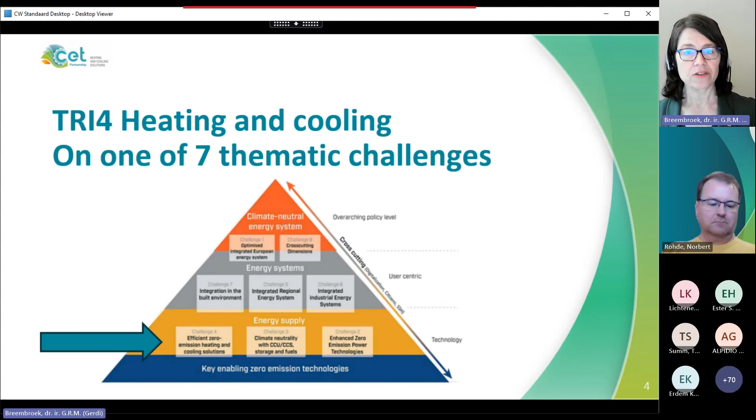When it comes to heating and cooling, we can think about solar thermal, we can also think about geothermal. But today the solar thermal technologies are in focus. We want to highlight the transformative power of solar thermal energy and share with you potential recent developments, and hear about the ongoing projects on solar thermal in the CET partnership that come from the 2022 call.

So we will, in a way, set the scene of this research and innovation collaboration that we want to emphasize and strengthen on solar thermal, and we want to make you aware of what's ongoing, what the environment is for these technologies, but also make you aware that there will be a new call with new potential for you to be involved in funded projects.

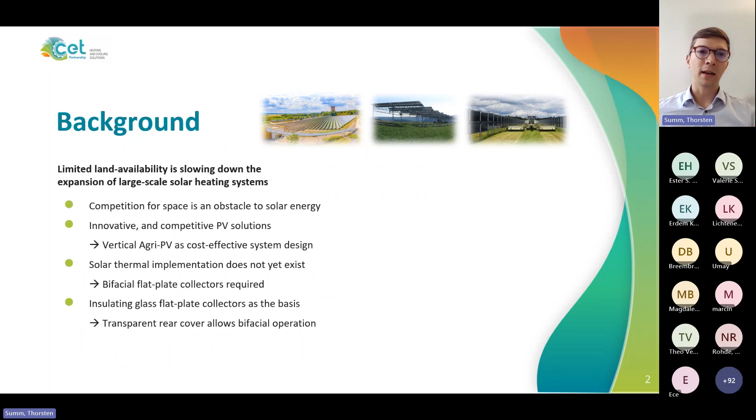So within a previous research project, we were heavily developing the so-called insulating glass flat plate collector, which we see as a basis for this novel agri-solar thermal system we try to develop within this project. Here we can see a prototype of that collector. As you see, it looks pretty similar to conventional types from the front, but at the back side, as you can see here, we have a transparent rear cover because of that glass assembly, which we would like to utilize to come up with bifacial agri-solar thermal systems.

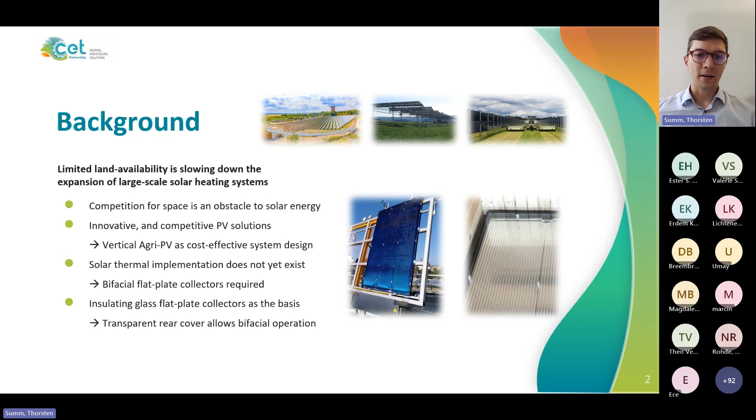And that brings me to what we have in mind for the project. You can see here a very rough sketch of what that system could look like. But if we combine this agricultural land use with solar thermal, many questions come up that shall be answered in order to really successfully implement such a design.

For example, what about the spacing between the rows of collectors, so that agricultural activities are still possible, but also the solar yield is still in a range we consider reasonable? What about the total space requirement of such a system? How much energy per square meter can we really get out of it? What about the crops? Has it implications? Which kind of crops can we really harvest in a reasonable way?

What is the system design? What does it look like? What requirements does it have? We have this kind of novel and special combination of two fields. Of course, obviously, what is the solar yield? And what about shading? Does it have a special impact on these kinds of systems? And many more questions to be answered.

Within the project, which is funded from the CET partnership, we try to first conceptualize such a system design by taking the requirements of the system, noting it down, and understanding what is the basic concept and what are the implications of this innovative way of designing a solar thermal system.

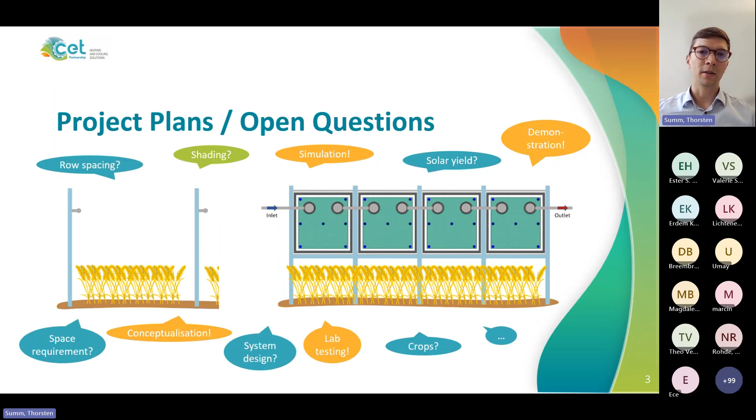When it comes to the shading of these systems, we took an example where you can see here the row spacing of 12 meters, a ground clearance of 1 meter, and 1.5 meter module height. We tried to understand what are the shading effects for that, whether they are critical for the system design, and how to consider this in the next project phases.

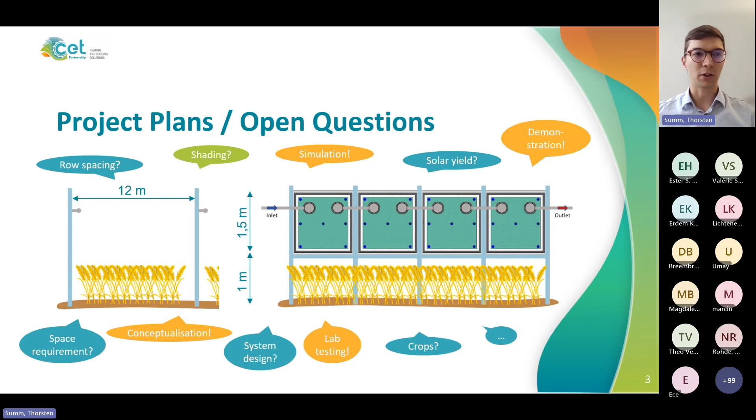So what we did is an analysis of the incident angle and the shading. It's important to understand how the system effects behave, and also to see that in comparison to conventional systems. So what I'd like to show you first is the incident angle modifier, which shall represent a value to assess the amount of power the system can provide compared to its maximum power. We investigated that for a conventional south-oriented system with an inclination of 30 degrees. As we can see here in this diagram, for the summer solstice day, we see nothing very spectacular. We know that the peak of the solar production is during the mid-time of the day.

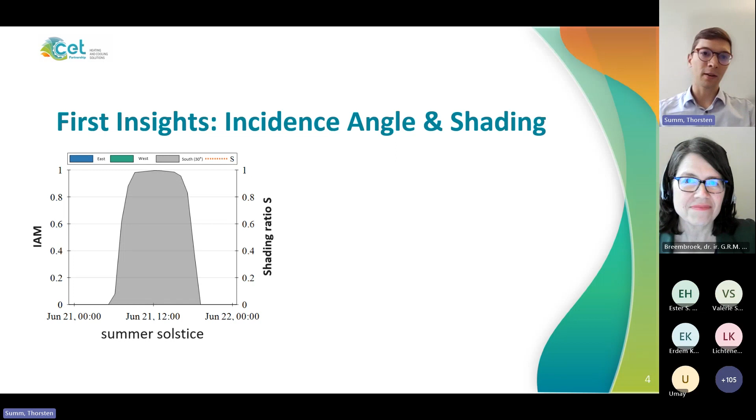But now it becomes interesting to see what happens for the bifacial part, where we actually have an east-west oriented system. We have the east side, which has the energy production in the first half of the day, and at the west side the second. What we also saw is that the shading, which we see here in this orange line, is not heavily affecting the solar energy production in our example, but just at the very beginning and end of the day it becomes important.

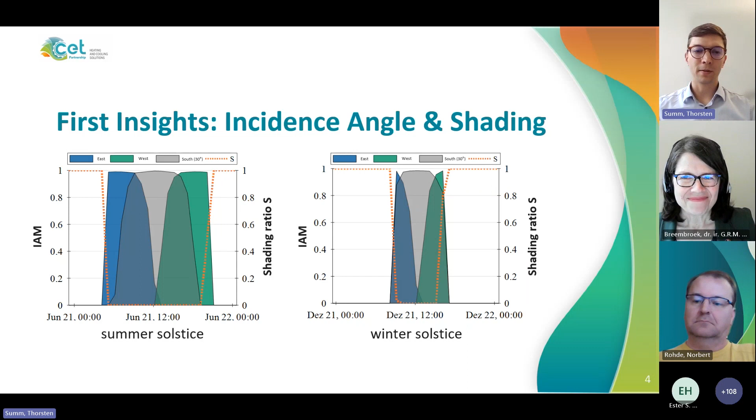As I said, this is just for this first example, and we'll try to continue with these investigations and elaborate more in detail. For the winter solstice, we did a similar kind of thing. As a summary, because my time is already up, we saw that this bifacial system has increased seasonality compared to conventional systems, and the shading, at least for this first example we calculated, was not as critical as we thought. However, it's important to continue these investigations to show the overall analysis and final overview. But this was just what I wanted to show you, and I'm curious about your questions. Thank you.

I think we cannot— yeah, you're muted. Yes, Thorsten, thank you. Impressive. There are some questions in the chat.

One question is, did you calculate the impact of wind load on the structure for vertical installations? Are there any experiences, or how do you think about it? This is something we will consider within the research project. Within the previous project, where a similar collector setup was analyzed, we calculated the wind and snow loads for a south-oriented, conventionally installed type, and saw that this would affect the glass dimensions you have to specify, but this is something we consider manageable for the collectors. It has to be considered, of course, for the design.

It's raining questions, by the way, so I suggest that Thorsten also look into the chat, and while we go on with the presentation, you might be able to answer some in the chat. That would be great.

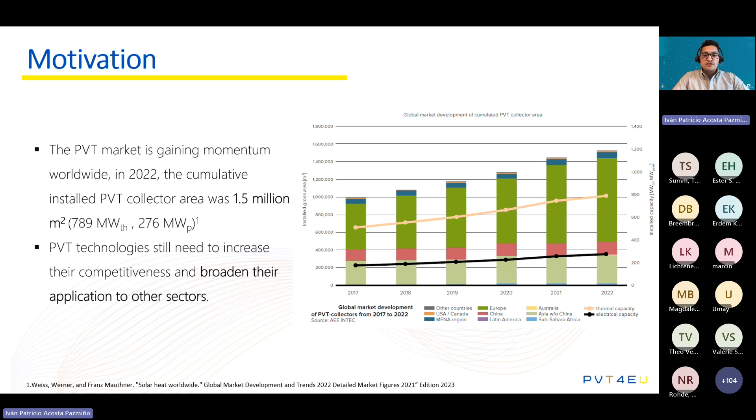Some of the things that motivate us to do the project is that even though PVT has been gaining momentum, we have also seen some companies in Europe struggling a bit in selling the technology. It's a new technology, so the problems that solar thermal have at the moment are a bit more escalated with PVT, because it's rather new. We have a lot to do to gain the trust of final customers, but also to develop technology that can compete in the market. So that was the motivation for us in the project.

The project objective is to develop two PVT technologies. The first, with one of the Swedish companies called Solar Peak, is more intended for applications in buildings. We're calling it a PV panel retrofit, where we try to take advantage as much as we can from the PV infrastructure installed in the last decade or so, and convert them into PVT collectors with a high efficiency heat exchanger that we're trying to develop.

The second technology we're approaching is an enhancement of a previous technology, the Solarus collectors. We're hoping this technology will reach between 120 and 140 degrees, for commercial and industrial applications. So we're going to be enhancing the previous design that they had.

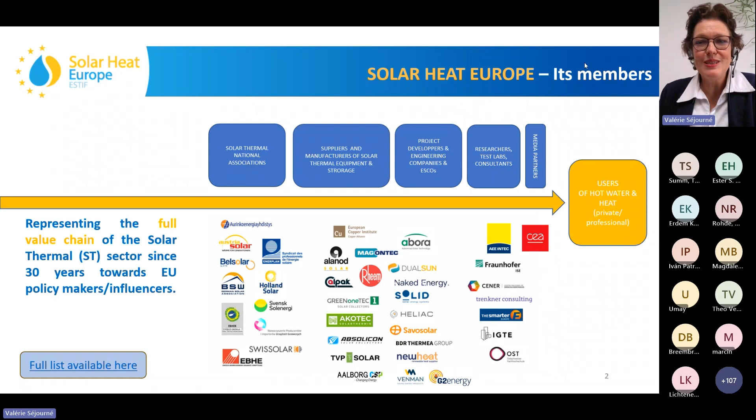So that's, in terms of assurance, very, very good for the end user.

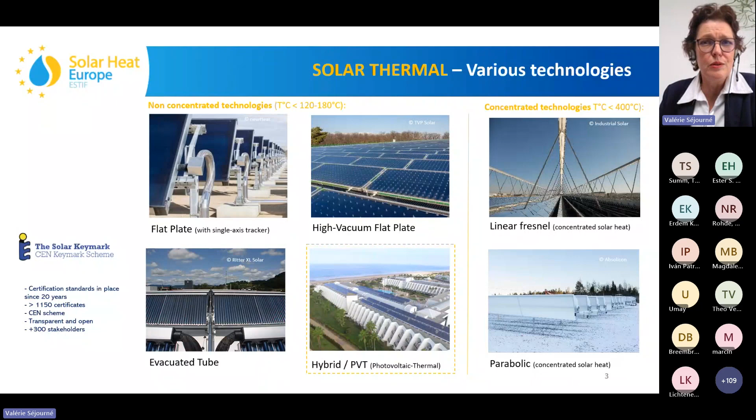Which are the market segments that apply for solar thermal? We have all the users of heat: from residential, where every one of us in our apartments or household can use solar heat, to tertiary buildings like hotels, hospitals, leisure centers, etc. And we have also the large scale for district heating and industrial users. I'll come to that in a second. So really any type of hot water user is in the scope of solar thermal.

In terms of market developments, we are now finalizing the 2023 market data, so what you see here are still the 2022 data. We have more than 10 million rooftops equipped with solar thermal in Europe. The total installed capacity is 40.5 gigawatt thermal. We saw in '22 a growth of plus 12%.

We anticipate that the figures for '23 may not be so positive, or it will very much depend from country to country. But what we definitely want to indicate is that the market over the last decades has been growing, especially in the last years, and we really want it to even triple as we reach 2030 and the CO2 reduction objectives. What's important to see in this slide is that the biggest market in terms of installed capacity...

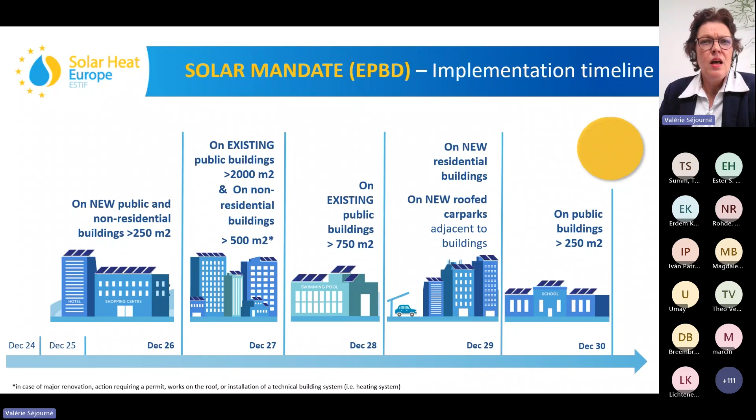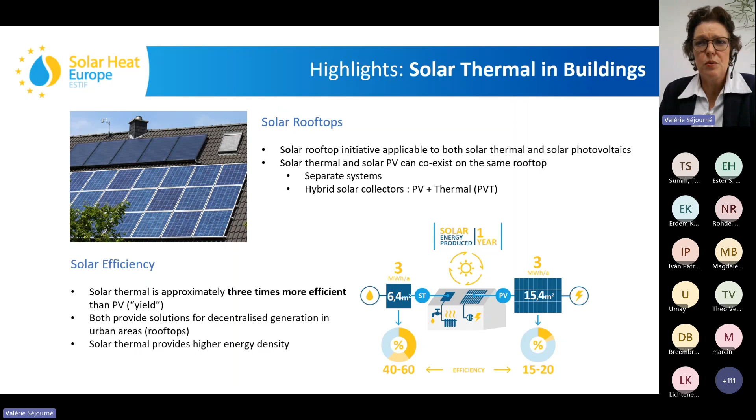If we look a bit quickly at buildings, what we like to say is that the yield in terms of rooftop space needed for solar thermal is 3 times more efficient than for PV. You see a picture on the slide where a rooftop happily combines the two technologies, and this works well because you make the most of your rooftop by adapting the necessary size you need for your heat needs and the rest for electricity needs. So it's important to remember: a better energy density for solar thermal compared to PV.

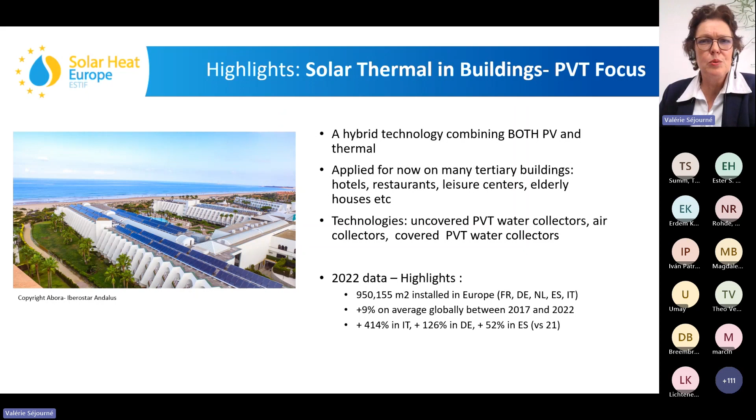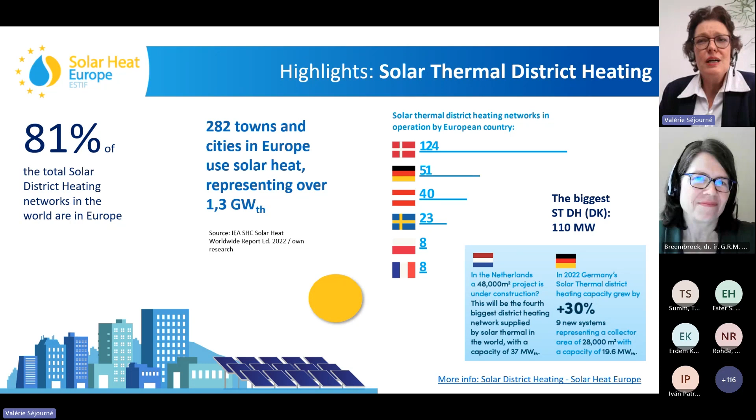In terms of district heating, I will not be very long because we have real experts coming on stage after me on that. But what is important to keep in mind is that Europe has 80% of all the solar thermal district heating here on our continent. So we are really, compared to the global numbers, very active users of solar thermal district heating. 280 towns in Europe are using solar heat, and you see that Denmark is a very important user.

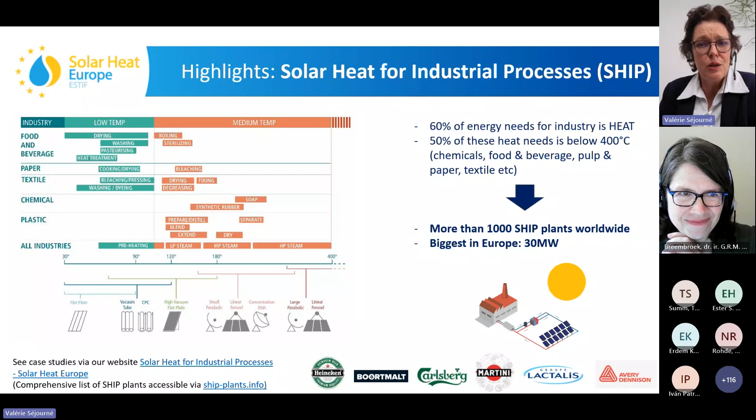Very quickly now to finish, the industrial use of solar heat - we won't discuss it today, we will discuss more solar district heating, but industry applications are also definitely in the scope. You see here from food, beverage, paper, textile, chemicals, the different temperatures that we can use and that they use, and that we can meet with different collector types. We have the biggest installation in Europe, 30 megawatts with Heineken, and half of the industry needs can be met by solar heat.

Research - well, this is the research ecosystem in which we operate. We have a definite EU project for renewable heating and cooling. We have also now an implementation working group in the SET Plan, and at IEA level, this research program at global level. So in conclusion, solar thermal definitely has its role to play in the decarbonization agenda.

We have a policy framework which is now entering into implementation. So now is the moment to make it happen and make it deploy. We call for the fair treatment of all technologies. Awareness is definitely key, we need more of that. So activities like today are really very welcome, and we need to have also all the enabling conditions - financial incentives and skills - to really support that deployment.

I will just finish by promoting the recent manifesto that we released for the upcoming politicians. It's available online: Solar Heat is Smart. Happy to have your questions.

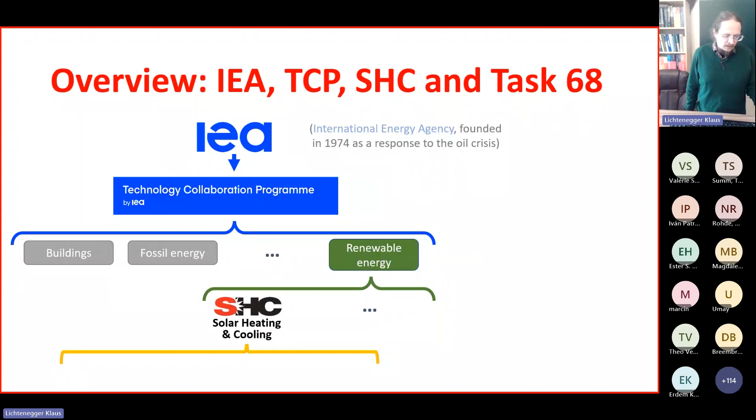So what I want to show is a very brief general task overview, the motivation, the structure of this task, some applications, and what's the timeline. So as a brief overview, the International Energy Agency was actually founded as a response to the oil crisis in the 70s and is a big organization with lots of activities like strategic oil reserves, publishing statistics, but there are also these technology collaboration programs on various types of energy, also renewable energy. And among those, there is again solar heating and cooling, where we have several tasks, as the projects are called there.

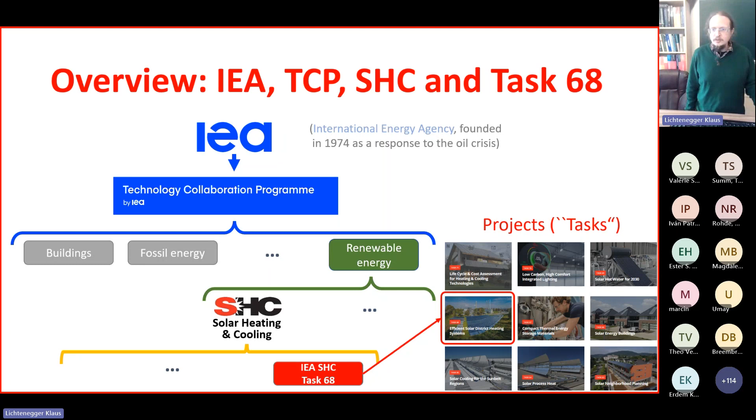And one of these is the task 68 on efficient solar district heating. So what's the vision? Well, we want solar heating and also solar cooling for secure and sustainable energy for all. And well, we cannot do everything, but we can bring the research results and the information to the experts, to the public, and be a platform for connection.

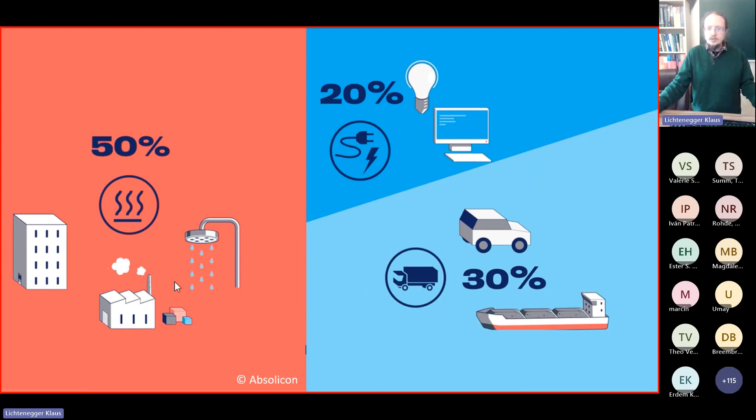So what's the motivation? And I already put this nice logo here, designed by one of our partners, Heat is Half. So in a very rough picture, as probably most of you know, but maybe not all, about half of our energy demand is heat, and even of the rest, more goes into transportation and mobility than into genuine electric applications. If we have a little bit of a more detailed picture, there it's not on a global level, not exactly half, but very close.

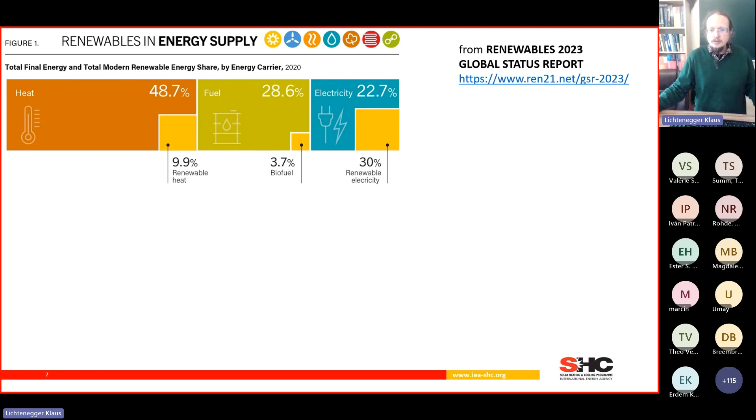So still about half of the energy is carried by heat. It's then distributed quite evenly among buildings, industry, and transport plus agriculture.

The situation has improved, but for many years one has only talked about electricity and renewable electricity, but that's only part of the picture, not the biggest part. In renewable heat, we're at about 10%, so we have to do something about this. This is the main motivation where a task like this exists.

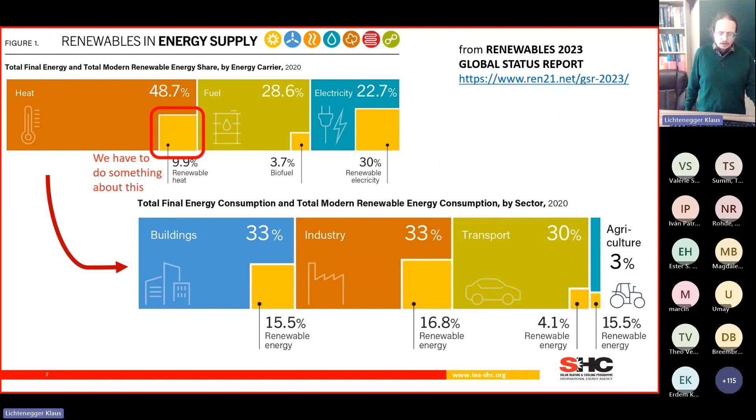We're here to talk about solar thermal, but I want to briefly review why solar thermal plants. We heard already about it. It's of course true that solar thermal plants have a larger energy output than PV. If you combine PV with compression heat pumps, you end up with roughly the same heat output. So it's not clear to say that solar thermal is strictly better. I wouldn't advocate that, but you have to cleverly choose the right technology.

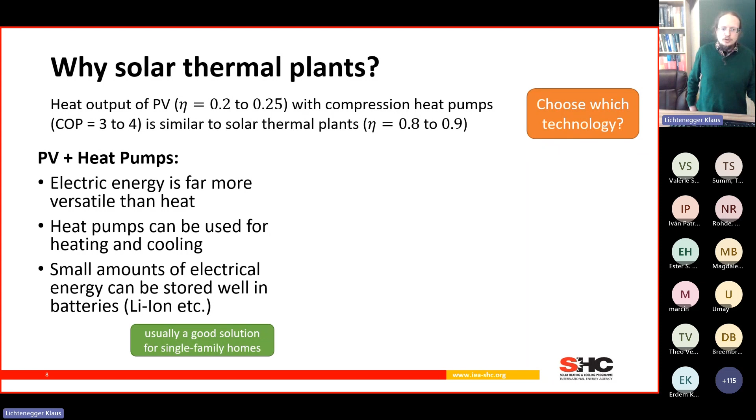If you use PV and heat pumps, you start with electric energy, which is more versatile than just heat. Heat pumps can also be used for cooling, and small amounts of energy you can store quite well by now in lithium-ion batteries and so on. This can be a good solution, e.g. for single family homes. But also solar thermal plants have their merits.

The technology is far less dependent on rare elements - think rare earth elements, lithium, cobalt, and so on. You do not have refrigerants which are potentially harmful to the climate and to the ozone layer. The storage of large amounts of heat is much cheaper than battery storage. This can go up to seasonal storage.

The integration into district heating grids is quite straightforward. You can use solar heat also for regeneration of ground heat, so this can act as a heat source for ground heat pumps. And last but not least, and unfortunately increasingly important, the leading manufacturers are here in Europe, so we are less dependent on manufacturers from other parts of the world, less dependent on Chinese technology and so on. The value chain, the value creation, can be kept here.

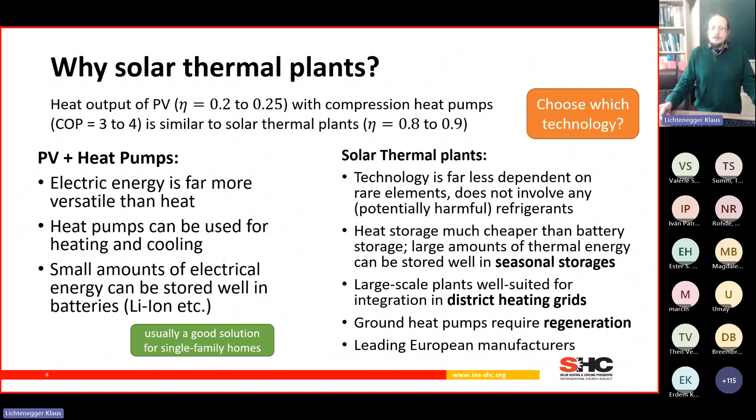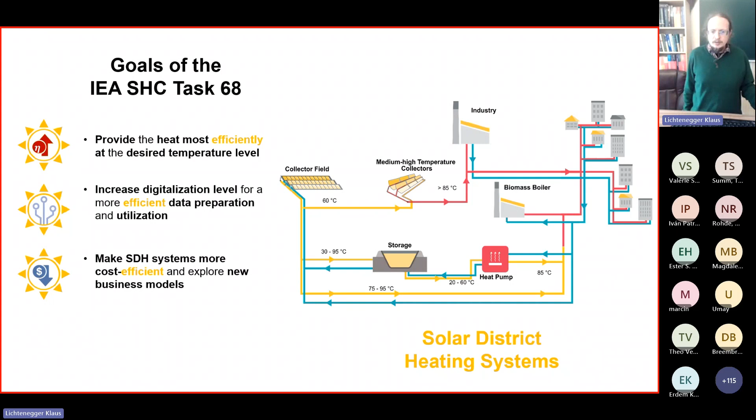So what do we do in the task? We care about technology, providing heat efficiently at the desired temperature level. We care about handling data preparation, data utilization. We care about cost efficiency, and we care also about efficient dissemination.

The activities are structured in 4 subtasks: about concepts and technologies, about data preparation, utilization, and control, about business models, and about use case and dissemination. And all these tasks study technologies and components, but also complete systems.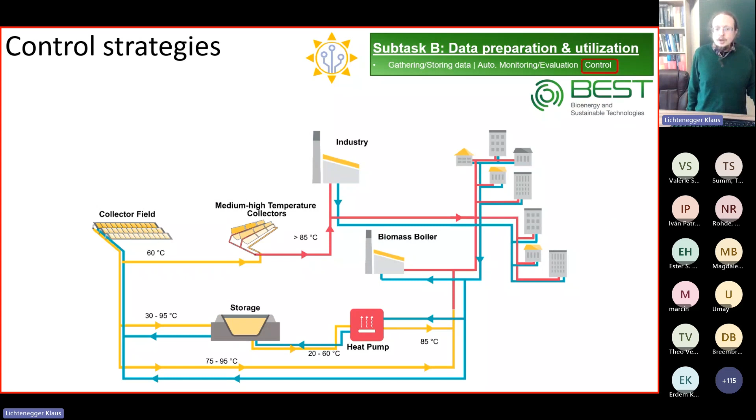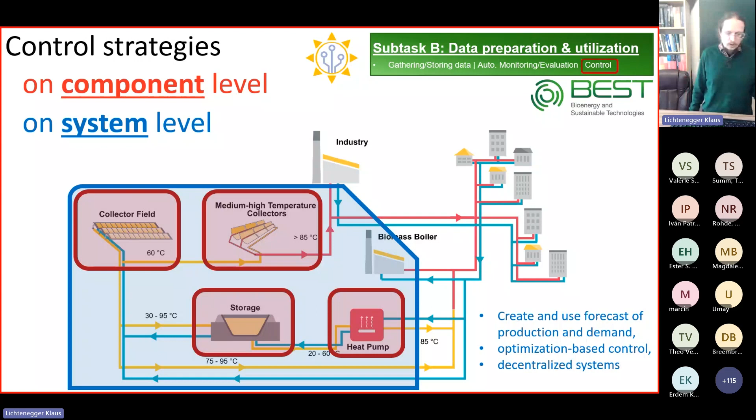Another topic in this subtask is control, where we care about control at component level, but also at system level. Predictive control was already mentioned, and of course you should do this also for complex systems which involve solar thermal plants. You can create and use forecasts, perform optimization-based control, and also decentralized systems to handle these complex energy systems.

This task is already close to the end. We had a task meeting about a month ago. There will be another one connected to the EuroSun conference in Cyprus, and there will be a final meeting in February. Then the task will end, but there will be follow-up activities, or at least they're planned. If you're interested, if you want to join, just get in touch. Thanks a lot.

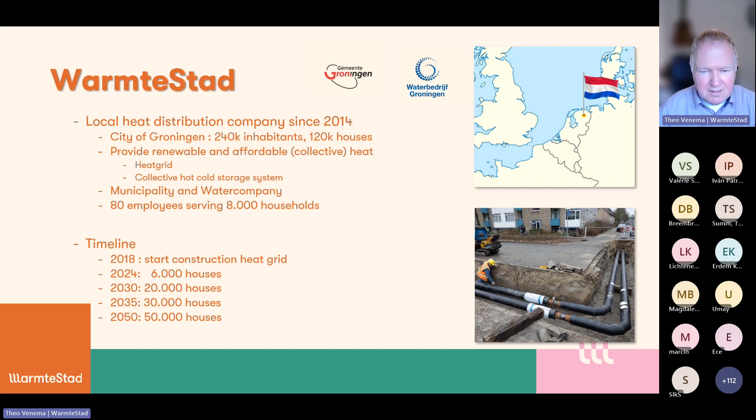We started up in 2014, but actually started construction of the heat grid in 2018, reaching about 6,000 connections by today, with the ambition of adding about 40,000 more in the coming decades. So we're quite ambitious concerning the growth of the heating company.

Our customers, you would not be surprised, are mainly housing associations and homeowners, so it's really the urban environment, just for domestic heating of buildings. Most of these buildings are built before the 1980s, so they need quite a high temperature to receive enough heat. However, we supply heat at a fairly lower temperature, making it an incentive for them to insulate their houses as well and reduce heat demand.

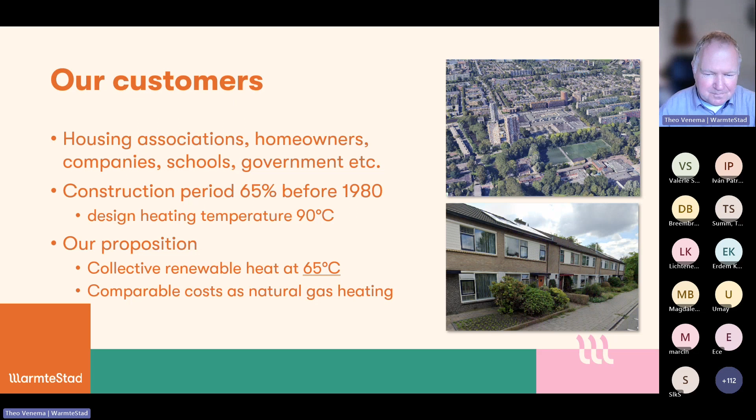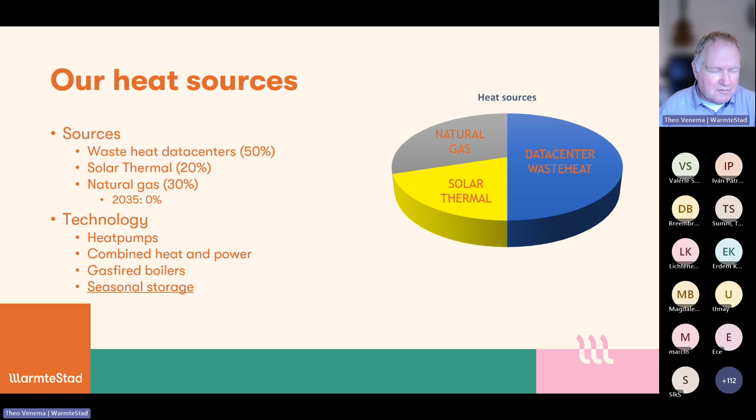Of course, if you construct such a heat grid, you need renewable heat sources as well. At the current moment, we have waste heat from 2 data centers. This year, we will be connecting the solar thermal plant to our heat power plant, and we still need some natural gas for peak demand situations during wintertime. Of course, we use the usual techniques like heat pumps and CHPs for the production of this heat. Our heat plant is situated almost adjacent to the 2 data centers.

That's just a coincidence, so we can easily get their waste heat to our heat plant and lift the temperature with heat pumps. We were quite satisfied with this concept when a project developer came up to us and said he could do something with solar thermal as well. We said, well, no thank you - we are already well on the way with the data center waste heat, so we would not need any solar thermal. I'll show you a graph that demonstrates that as well.

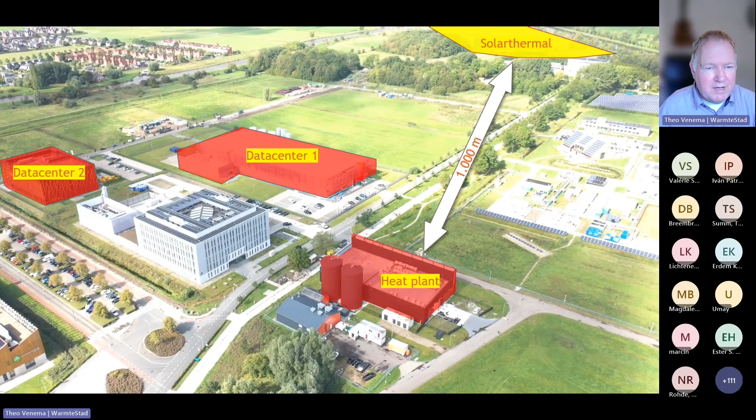So it's not the installation at the right side of the screen, but a research center, a bit more to the north, just 1 kilometer away. There was a former dredge depot which was being abandoned, and this entrepreneur wanted to make this solar thermal project and deliver the heat to us. While that is a very good renewable heat source, we already had enough heat from the data centers during summertime.

Right now we are very happy with this project being finished, because we needed the heat for our heat grid. Well, of course, it's not that complicated if you put it in such an easy picture. Heat is being produced, stored in the daily storage, transported to our heat plant, and delivered to the houses connected to the heat grid.

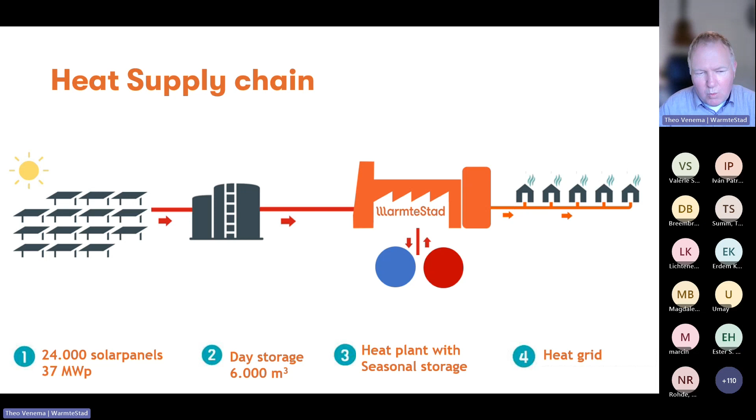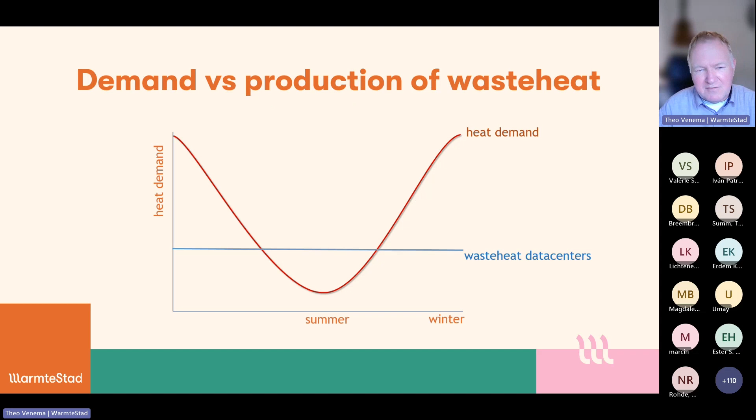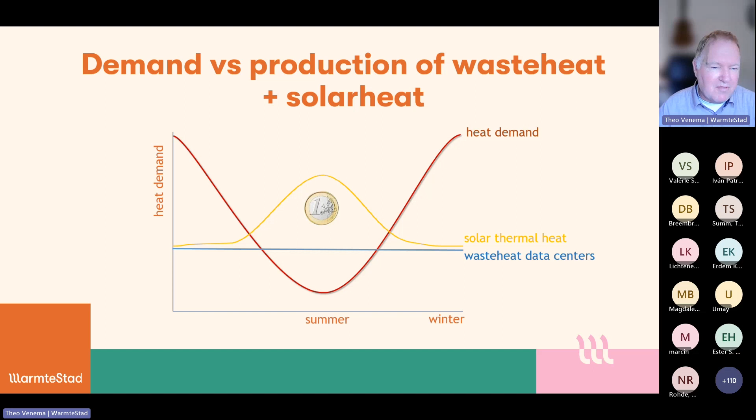However, we expanded our heat plants with a seasonal storage in order to accommodate the matching problem from the challenge of matching supply versus demand, because demand is lowest during summertime and highest during wintertime. We already had abundant waste heat from the data centers during summertime. If you would put expensive solar thermal heat on top of that, it would just be a waste of money, right?

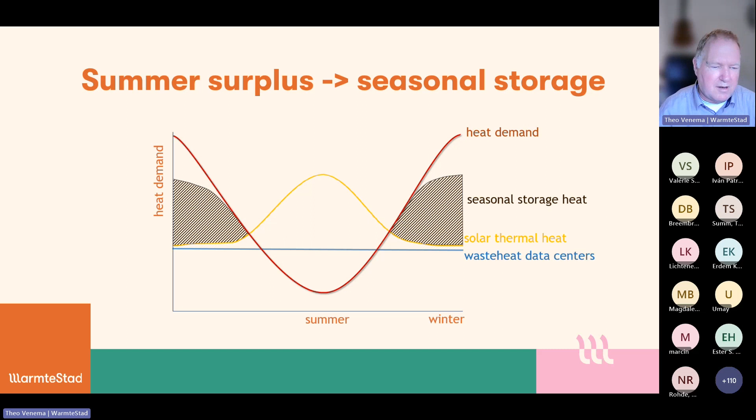So all this heat would be considered as excess heat and lost heat. If there only was a way to store this heat in a seasonal storage, then it would solve another problem, and that is that during wintertime we actually had a shortage of renewable heat sources, so it could benefit us mostly during wintertime. And that's why we endeavored in developing a seasonal storage system.

Of course, we looked into several options, also the pit storage, which is commonly used in Denmark. But we ended up opting for an ATES system, Aquifer Thermal Energy Storage, which is more or less a supercharged hot-cold system.

For a different set of reasons which are depicted here. But the main reason is that we expect we would only need this solar energy storage for a limited amount of time, since our heat grid is growing, and then the baseload of our heat grid in summertime will be high enough to accommodate all the solar thermal. So that's why we opted for a very basic seasonal storage system.

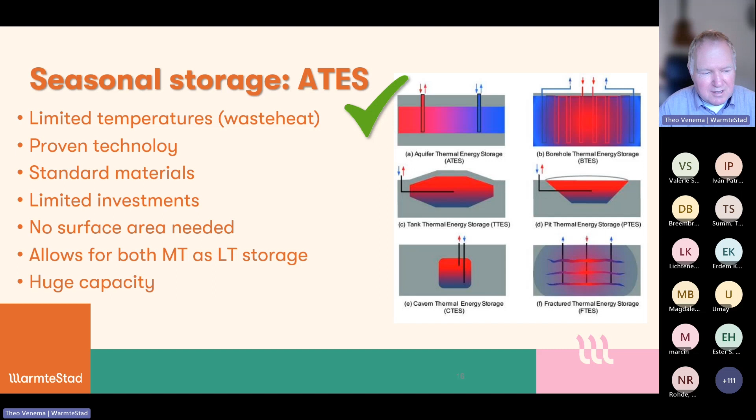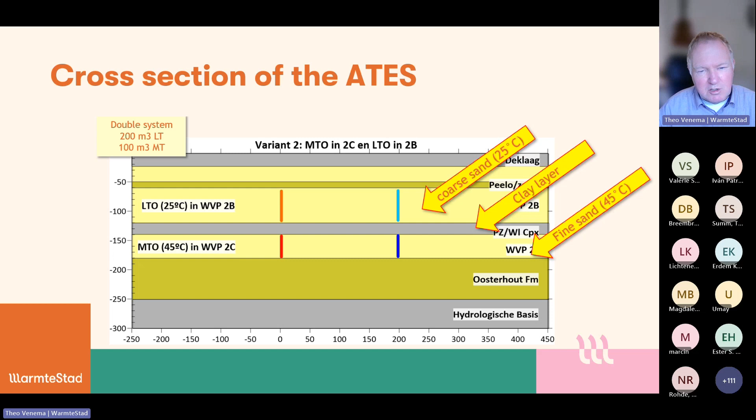If you would make a cross section of the soil in our country and in our city, and dig about 100 meters deep, there would be a coarse sand layer, excellently suited to store low temperature heat. And if you would dig even deeper, there you can store heat also at 45 degrees centigrade. So we store at 2 different temperatures, and during wintertime we use heat pumps to crank up the temperature and make it suitable again for our purpose.

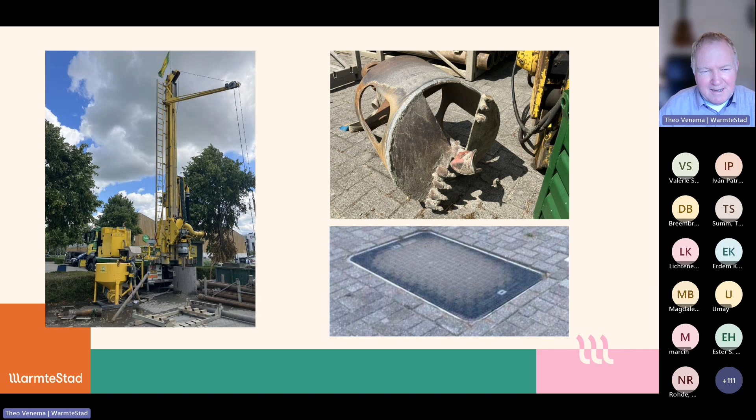In conclusion, findings of our seasonal heat storage: it enables us to combine competitive renewable heat sources like waste heat with summer heat in the summertime for wintertime use. We can mitigate any take-or-pay risk from the solar heat in our developing heat grids. And by having this seasonal heat storage, we can substantially improve our share of renewable heat in the heat grid. So it's really advisable, especially in starting developing heat grids, to combine this solar heat with an ATES system.

That will be all for today. I've got maybe 10 slides more, but the main thing you have already heard by now. So thank you for your attention.

I talked, but nobody heard me. Okay, I think there's time for a question, because if I'm not mistaken, you need to leave after 3. But there was one question concerning temperature levels, isn't it, Norbert?

Okay, let me see. Yes, there was a question about the heat recovered by the data centers. Does it have enough quality to be used in other buildings? What is the temperature level?

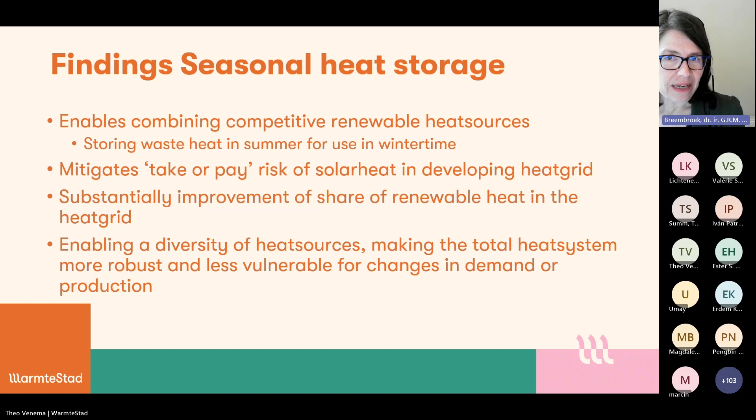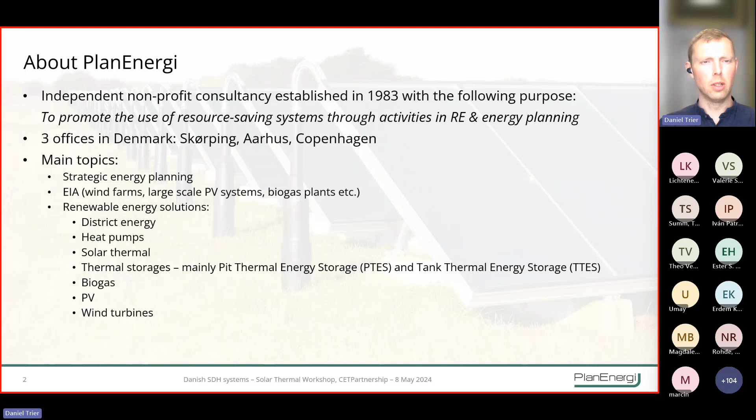Thank you very much, I hope you all hear me well. Yes, okay, I will share the screen. There we go. So thank you for the introduction. My name is Daniel Trier. I come from PlanEnergi, a consulting company, a non-profit, which just celebrated our 40 years anniversary. We have 3 offices in Denmark, 2 in Jutland and 1 in Copenhagen, working with strategic energy planning and environmental impact assessments and various renewable energy solutions, with a big focus on district heating, and especially renewable energy sources for that, as well as storages.

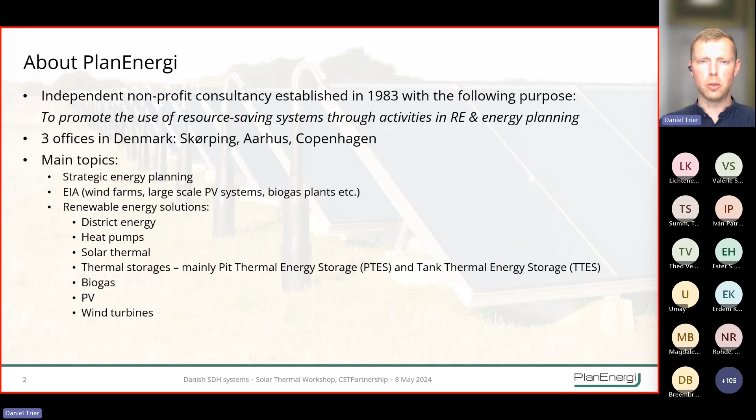The one which is oldest today, still operating, will have around 28 years of operation today. So it's actually fairly trustworthy to say that it's a reliable technology, which can really stand for a lot of years. And with this development, we also passed more than 1 gigawatt of installed capacity. At the time being, it actually was beyond the PV installed capacity, but PV has sort of exploded since then.

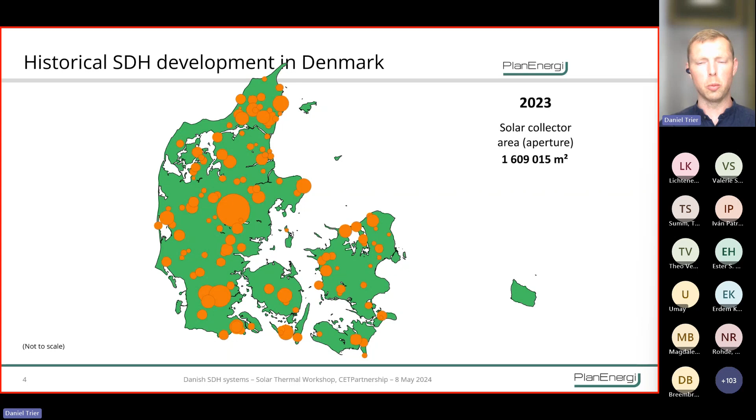And so the development of this is that we have a lot of decentralized district heating plants, which was based on gas historically, with some legislative limitations on the use of biomass. So it was sort of an obvious choice to invest in solar thermal, which could then lower the cost of heat and replace some gas boiler operation. We also have had some high taxes on natural gas.

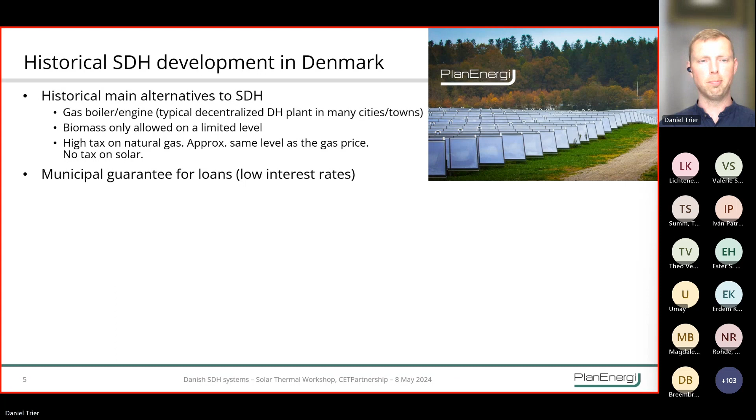Combining with the fact that solar thermal could get very cheap loans with long payback periods, in terms of you don't have to pay it off shortly, but that was accepted, and that could increase the feasibility of solar thermal solutions with a long lifetime, as I just explained before. So we also have a group under the Danish District Heating Association, sharing experiences and collaborating, which is also a benefit for the technologies.

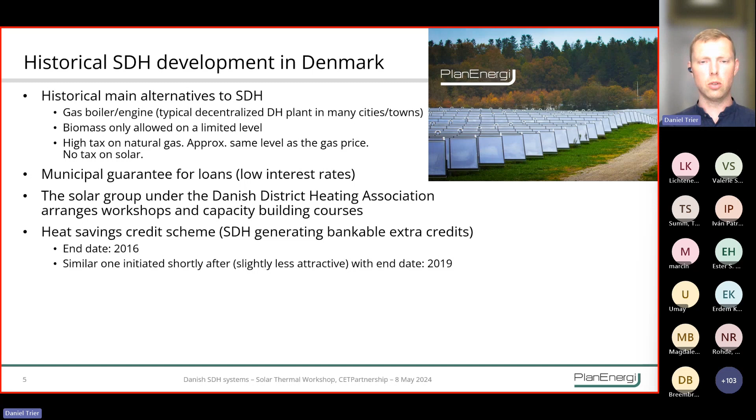Then in the past, we've had some indirect subsidy, you could say. We have had a credit scheme where you would generate heat savings credits by establishing a solar thermal system. So it could be actually up to around 10% of the investment cost of the solar thermal system, which could be a value generated by these credits, which can then be sold to other district heating companies. That scheme ended in 2016. Afterwards, there was a similar scheme set up shortly after, which then ended in 2019. That was also a benefit for the feasibility of solar thermal.

Heat pumps in district heating is a political priority in Denmark because of the large amount of wind power in the electricity system, and we wanted to promote the utilization of that, combining electricity with heat. So there was financial support for investment in large-scale heat pumps for district heating, and lower tax on electricity for heat pumps.

There was also sharing of experiences and lessons learned from developing that technology. The reason I speak of heat pumps is that it has had a big impact on the development of solar thermal in Danish district heating.

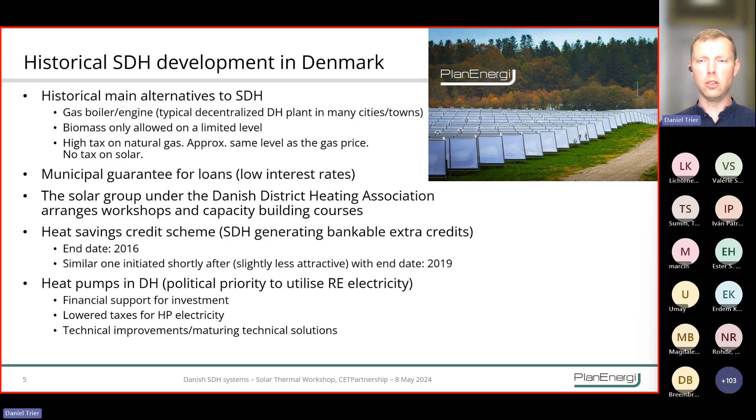Shortly about Danish district heating and the energy system: around two-thirds of the buildings in Denmark are connected to district heating. District heating is also non-profit, so we have relatively low costs and no competition between district heating companies, which means they can easily share experiences because there's no benefit of keeping good ideas for themselves. Most of them are actually cooperatives, owned by the users themselves.

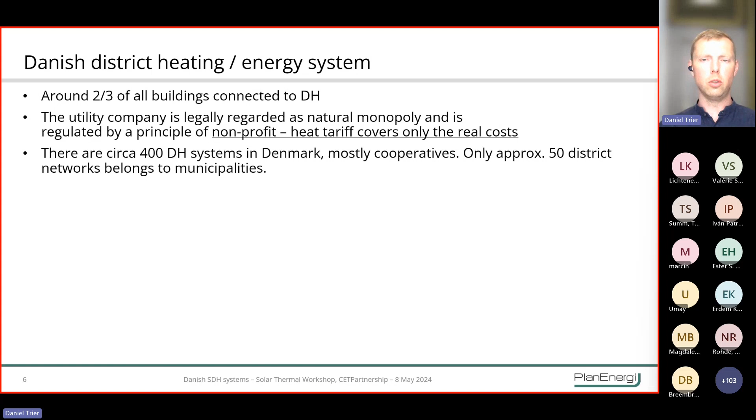In the past we've had a lot of gas-based CHP, combined with thermal storages to enable flexibility on the electricity production side. In other words, you could produce electricity and heat when electricity prices were most feasible or high, and store the heat in short-term storage for later.

This also means a lot of district heating companies already had thermal storage when they installed solar thermal, which is more or less mandatory to enable the large share of solar thermal.

Today we see another development: more flexible demand of electricity, meaning flexible use of large-scale heat pumps and electric boilers in district heating. We also have higher electricity demand for power to mobility and so on. In the coming years we'll probably see more power-to-X with a lot of electricity use, also enabling excess heat to be used in district heating.

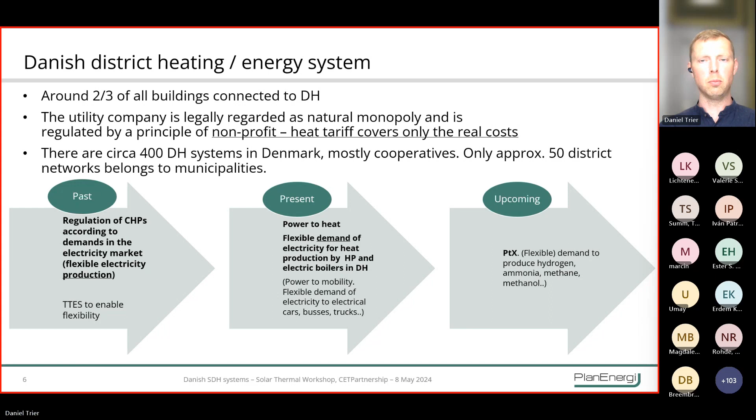All of this, combined with the development of solar thermal in Denmark, means that in the past three years or so we've seen almost no development in the solar thermal market in Denmark.

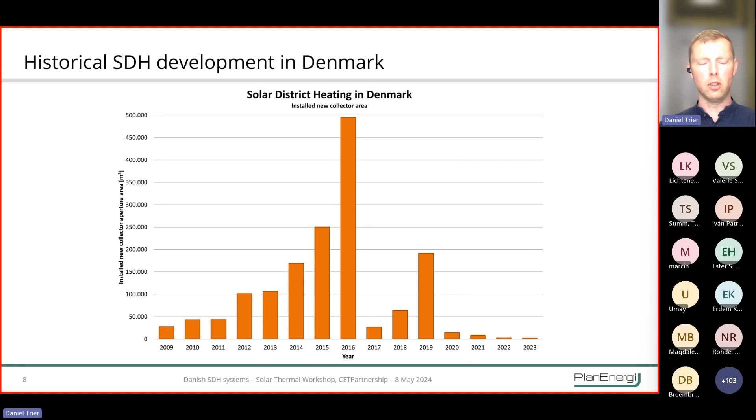You could also show it in another way. These bars show the annual installation of solar thermal. As I mentioned, the incentive scheme ending in 2016 meant a lot of installations were done just before the deadline, then almost nothing in 2017. Something similar happened in 2019.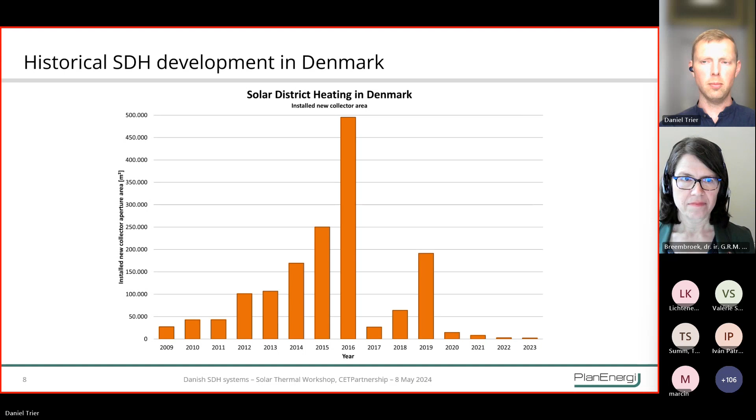One example of a recent system being installed with both solar thermal and a heat pump: here we see a roughly 6 megawatt solar thermal system and a 3 megawatt air source heat pump in the upper left corner. This is one picture of the combination of both technologies, which in many cases compete, but could also collaborate.

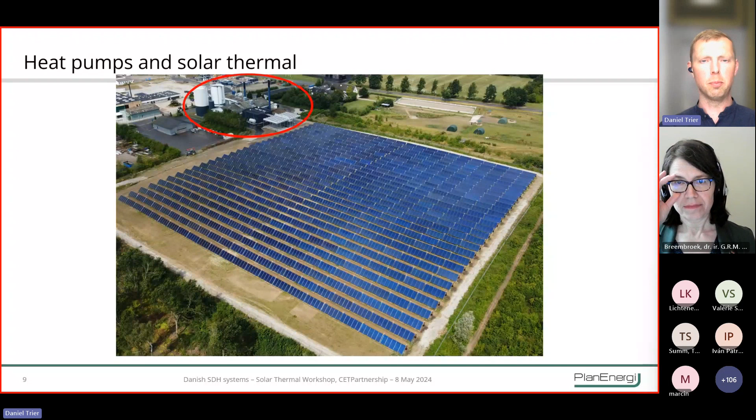I'll skip these, but these are just a few points of what happened to promote heat pumps, which then indirectly affects the solar thermal market.

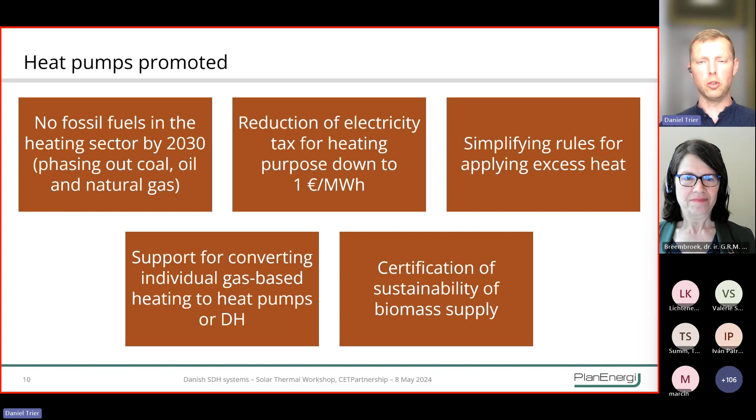Another development based on the historical development of solar thermal is that large-scale pit heat storages have been developed as a technology. Previously it was mainly for storing solar thermal, but today it's also used for balancing large district heating systems, not only with solar thermal but also with other solutions.

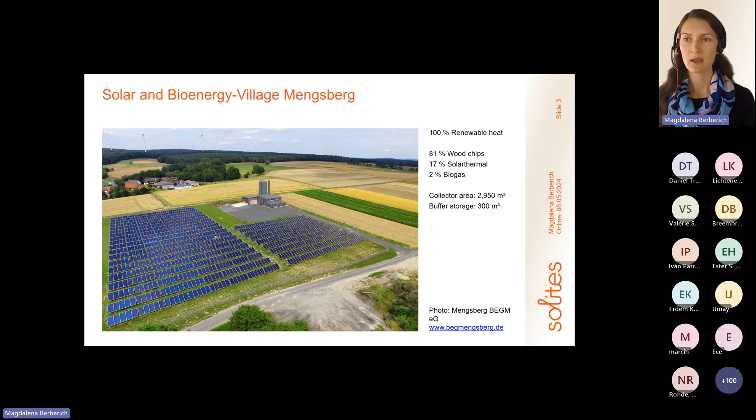What is the specialty of the system? In Mengsberg it's an energy community which owns the district heating system. They made a first feasibility study in 2013, then founded a cooperative, made contracts and so on, and then built up the district heating, the solar thermal plant, and the heat supply. So you see in the timeline, it's a long way from the first feasibility study to the heat supply with 100% renewable heat for this village.

The energy community has 141 participants who own the district heating and manage it. They all took a deposit per building for the piping and the transfer station, and then they are connected to the district heating system.

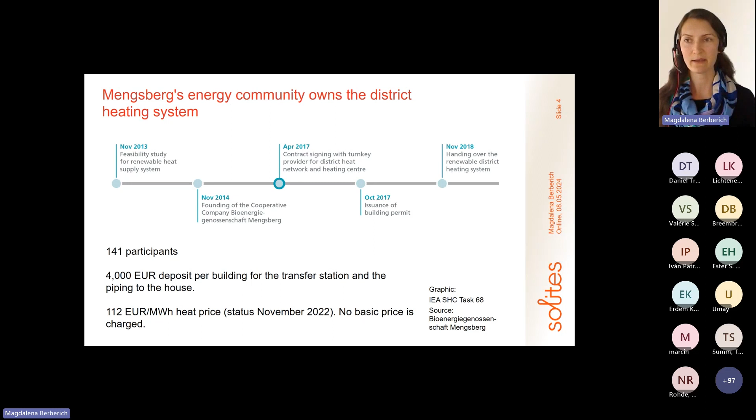As was mentioned before, accelerating the supply with renewable heat in district heating is really a topic, also for energy communities and for the whole system and market of district heating. We need to decarbonize district heating to have the climate neutral building stock like it is planned in Germany by 2045. This is why we investigate in more detail in an EU project how energy communities can take an active role in the heat transition, because we think it's very important to have this bottom-up initiative and to have all citizens take part in the heat transition.

This is the project Connect Heat, an EU initiative to develop heating and cooling communities in Europe. We create concepts, develop manuals and so on to support initiatives. We have real pilot cases in 7 different locations in the participating countries.

If you are interested in more information, there's a LinkedIn channel and also a newsletter on the website. And if you want to know more about bioenergy villages and solar energy villages in Germany, there's also a manual, unfortunately in German, but maybe interesting for some of you, with more examples from Germany.

How is the solar district heating market in Germany? We have 55 plants in operation in Germany with 160,000 square meters of collector area. We have 9 plants in realization, and 70 plants in preparation. So we have a good development in the market, with a lot of plants already installed and a lot more coming.

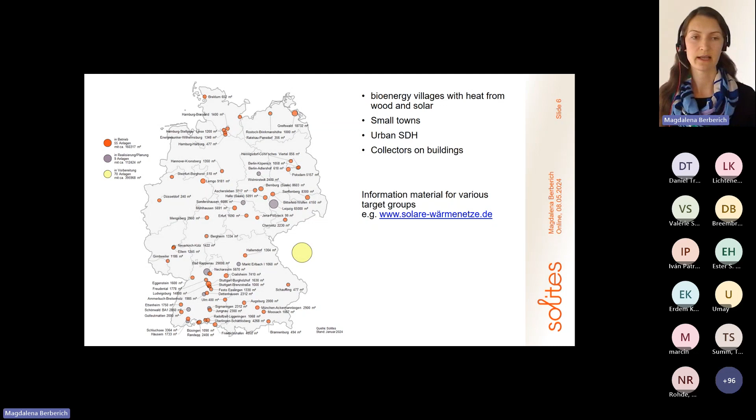How is the development supported by laws and funding? As I mentioned, the climate neutral building stock is planned for 2045, and there's also mandatory local heat planning for all cities since 1 year. There, the definition of areas for district heating and for single house solutions is necessary.

Additionally, a new national law, the Building Energy Act, is in place where new heating systems in houses need to reach 65% renewable share, or they need to be connected to district heating. Additionally, district heating providers need to make transformation plans for how they can decarbonize their heat supply.

To support this, there's also a subsidy program, Efficient District Heating, since 2022, with funding for investment and for operation. In sum, you can get around 50% of the investment funded.

We have the next step now in the size of solar district heating plants in Leipzig, with 65,000 square meters of collector area. It's the largest plant now in installation in Germany, and here the collectors deliver heat at up to 110 degrees C to the city's district heating network.

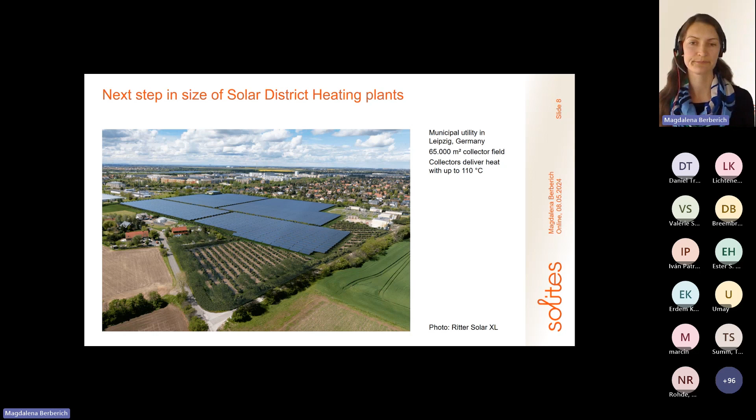In this field of the temperature level of the supply of solar district heating, we see some more research topics. As mentioned in IEA SHC Task 68, where I'm also involved, we are creating a report analyzing different collector technologies of interest for district heating. For each temperature level there are different technologies, and we are comparing how they can be used in district heating.

We have a brand new German research project, Netz, where we also want to elaborate on this topic more. Another research topic, as mentioned before by Daniel, is thermal energy storages, like pit heat storages. We see research topics in the system integration of heat storages and solar thermal plants, but also in construction methods and materials to ensure a long lifetime of these constructions.

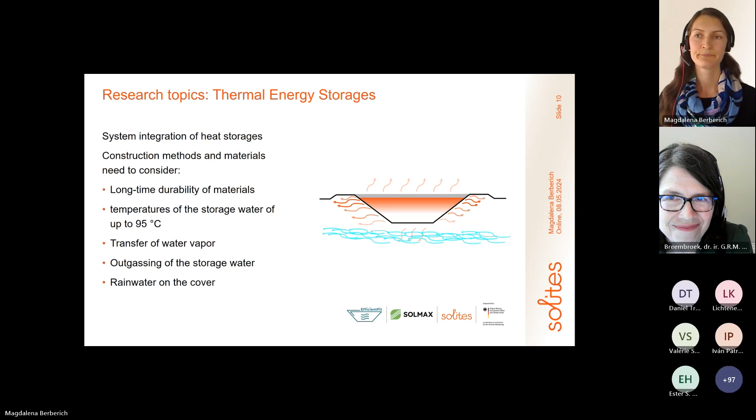Another best practice in Germany is the energy concept for Hechingen. It's a new building area, and here we have around 95% fossil-free district heating with solar thermal, seasonal heat storage, shallow geothermal, and heat pumps.

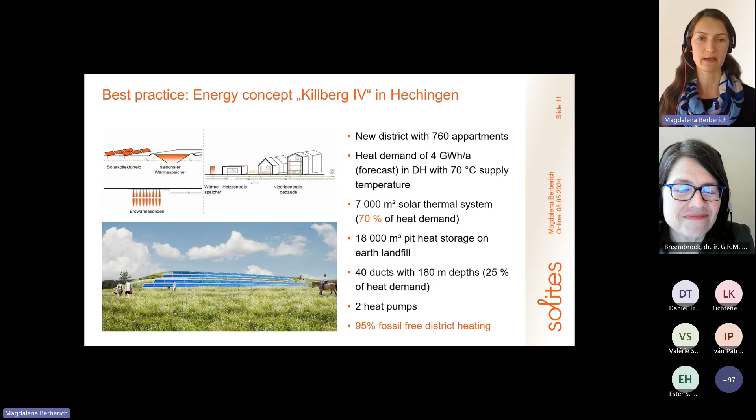Thank you very much for this presentation. It's also interesting to see what's happening in Germany, and this makes me think about the Renewable Energy Directive of the European Commission, which is really underlining the importance of the transition for heating and cooling operations as well, away from the earlier focus where energy and electricity seemed to be synonymous.

There are some questions, I think. Norbert, yes, there's a question for you, Magdalena. How sustainable really are wood chips? Where do they usually come from? What programs are in place to ensure they come from sustainable forestry?